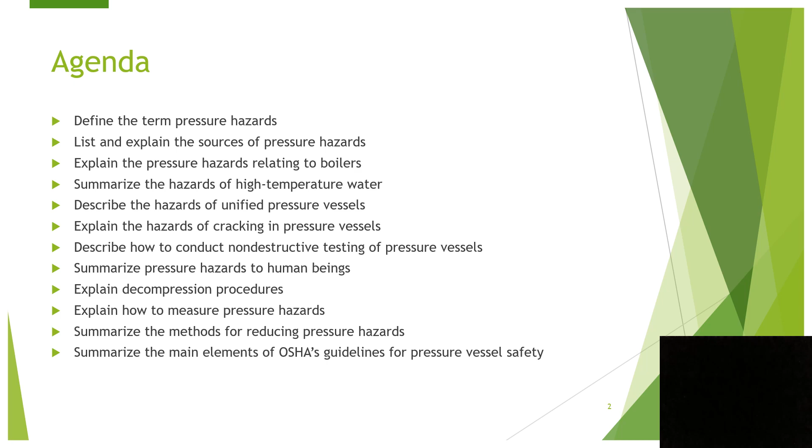What is pressure? Pressure is defined in physics as the force exerted against an opposing fluid or thrust distributed over a surface. This may be expressed in force or weight per unit area.

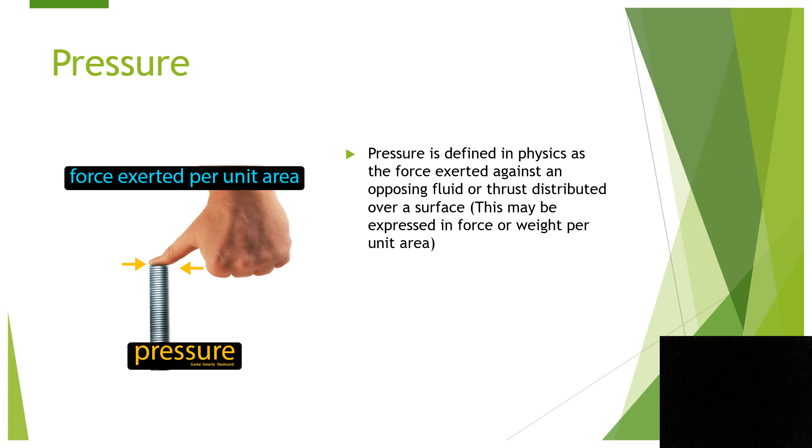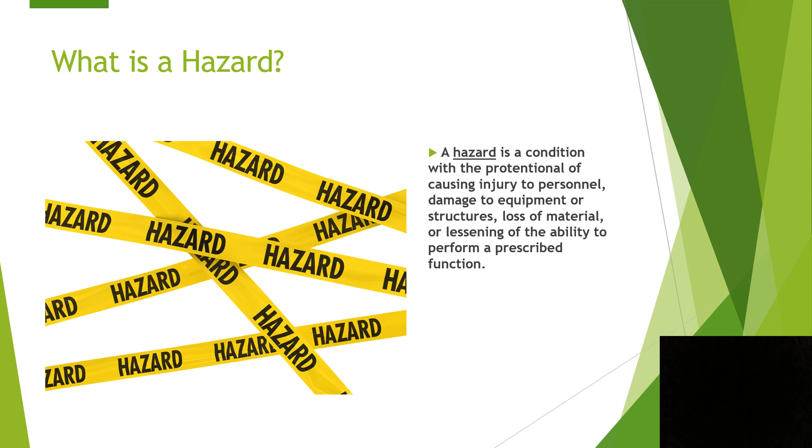What is a hazard? A hazard is a condition with the potential of causing injury to personnel, damage to equipment or structures, loss of material, or lessening of the ability to perform a prescribed function.

So what's a pressure hazard? A pressure hazard is a hazard caused by a dangerous condition involving pressure. Critical injury and damage can occur with relatively little pressure.

The Occupational Safety and Health Administration, or OSHA, defines high pressure cylinders as those designated with a service pressure of 900 psi or greater. I have a quick video that's going to show how pressure vessels can be deadly, and what the effects of a pressure vessel without the proper safeguards can actually do to a facility.

Hello, I'm Chemical Safety Board Chairman John Bresland with a safety message. Pressure vessels are everywhere throughout industry. From major chemical plants to service stations, they are indispensable to modern life. But without appropriate safeguards, pressure vessels can present lethal hazards. These hazards can occur when the vessels are improperly installed, welded, or modified, or when they lack effective pressure release systems. The Chemical Safety Board has investigated a number of serious, even fatal accidents where pressure vessels failed suddenly and without warning, creating deadly projectiles. My safety message is simple: pressure vessels store huge amounts of energy, and you must never become complacent about the risks.

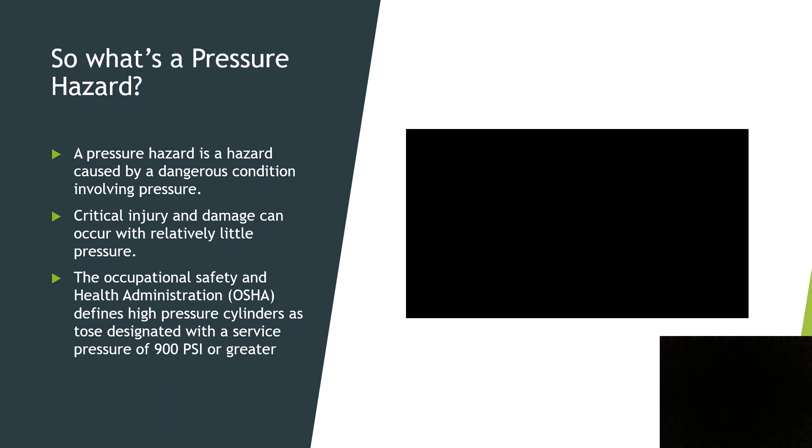So now we're going to go over the sources of pressure hazards: poor or insufficient training of employees, design, construction, or installation errors, improper application of equipment, insufficient or improper inspections, insufficient preventative maintenance, failures or blockage of control or safety devices, and mechanical breakdown or failure, or just human error.

I have a video of an actual explosion of a steam boiler. This gives a good example of the damage that a pressure vessel explosion can have on a facility.

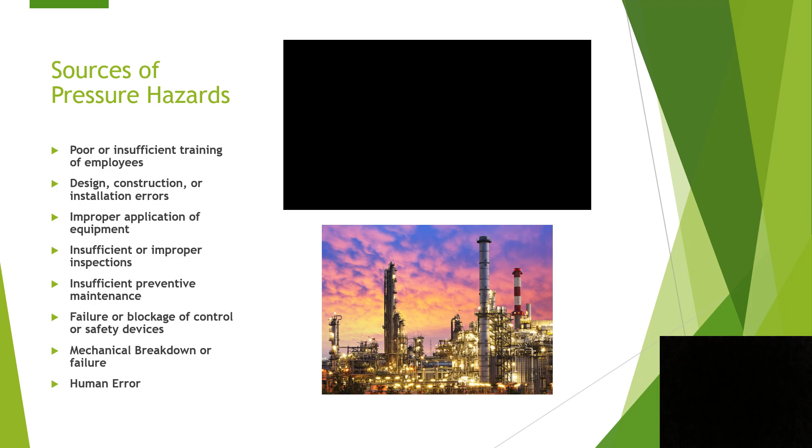So what are some of the pressure hazard prevention measures for boilers? OSHA recommends the following daily, weekly, monthly, and yearly accident prevention measures in 29 CFR 1910 subpart H.

Daily checks consist of checking the water to make sure it is at the proper level, venting the furnace thoroughly before starting the fire, and warming up the boiler using a small fire. When the boiler is operating, check it frequently.

As for your weekly checks, at least once every week, test the low water automatic shutdown control and record the results of the test on a tag that is clearly visible.

For your monthly checks, at least once every month, test the safety valve and record the results of the test on a tag that is clearly visible.

For your yearly checks, the low-level automatic shutdown control mechanism should be either replaced or completely overhauled and rebuilt. Arrange to have the vendor or a third-party expert test all combustion safeguards, including fuel pressure switches, limit switches, motor starter interlocks, and shutoff valves.

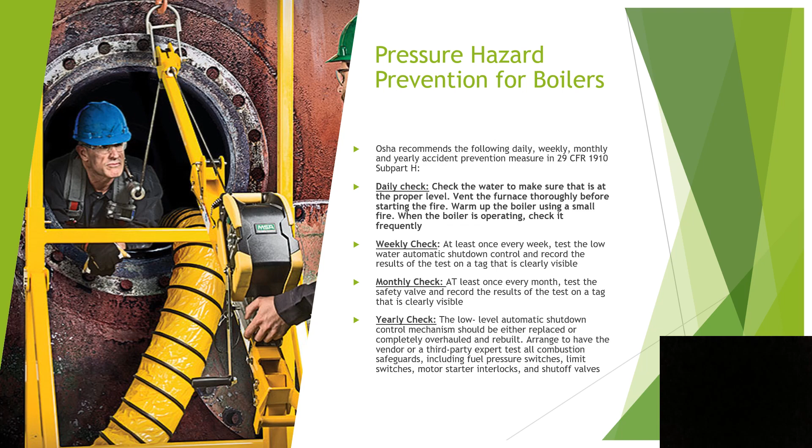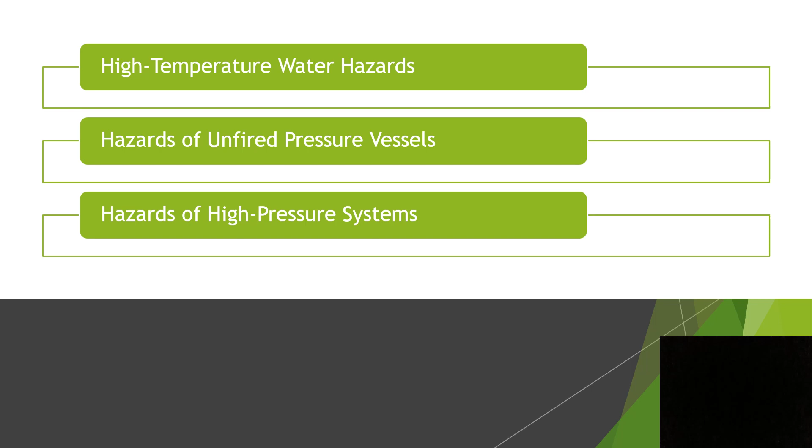Next, we're going to go over the high temperature water hazards, hazards of unfired pressure vessels, and hazards of high pressure systems. This will be covered in the next slides.

High temperature water systems are basically heated to a very high temperature, but not high enough to produce steam.

Some of the hazards with these systems are operator error, and human contact with high temperature water can result in serious burns or even death.

Improper design is another hazard. The best designs are simply operator friendly, so they don't require a lot of follow-on training to be able to operate them. Too many automatic controls can impede proper operator response to emergencies, so if they're too complicated, it can actually hinder the operation of these high temperature water systems.

High temperature water can be used as an economical substitute for steam, for example, in industrial heating systems.

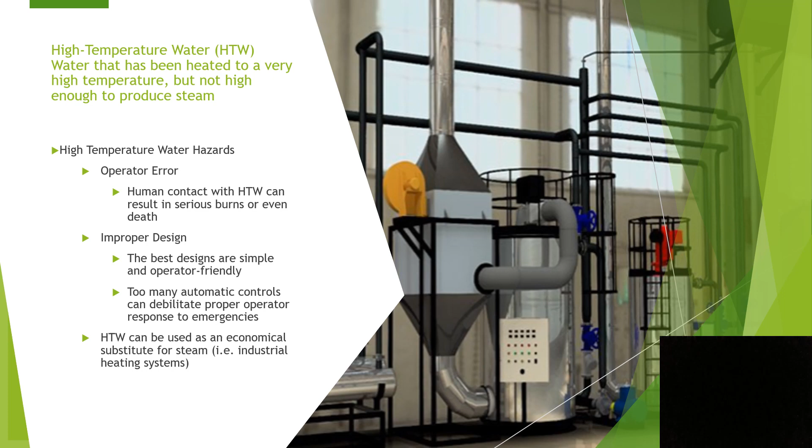Unfired pressure vessels create heat internally by various means rather than by external fire. For example, steam jacketed kettles.

The potential hazards with these are hazardous interaction between the materials of the vessel and the process material, inability to carry the weight and internal pressure of its contents, and inability to withstand pressure caused by chemical reaction during processing.

Basically, when you have a chemical process that creates energy in the form of heat, that heat can create pressure in a vessel. So it's definitely risky when mixing chemicals together with an exothermic reaction.

Also, there's an inability to withstand accidental or intentional vacuum. Some preventative measures you could take are proper design and construction, working pressure and temperature range, stress relief, radiography, and continual inspection and periodic testing.

A lot of the time when a manufacturer decides to purchase a vessel, they have to meet certain codes. They have to be built to a certain standard, such as documentation like MTRs showing what material it's made from, radiography testing, PMI testing, and all your NDE testing.

There are certifications that a lot of the customers who buy these vessels want. That way, if they're put into a situation, they have the documentation to at least prove that they followed this code, or it was built to this standard.

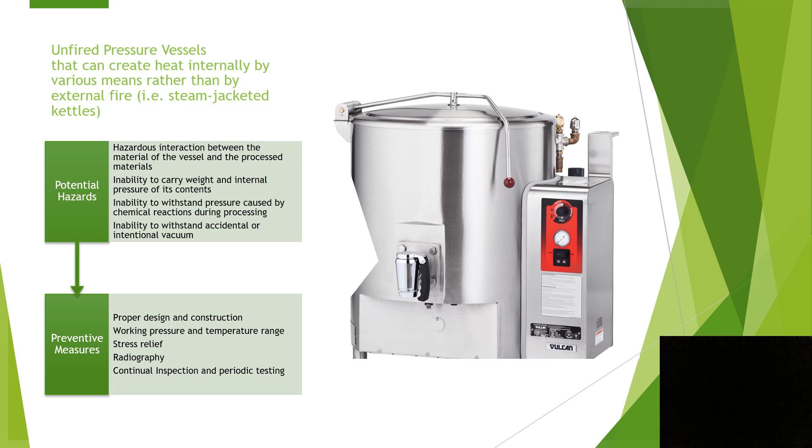And so, if something was to happen, they have that to prove that they checked all their boxes.

Some of the hazards of high pressure systems include leaks, pulsation, vibration, and release of high pressure gases.

Some of the hazard reducing strategies are using anchored pipe supports, limiting the number of joints in the system, and using pressure gauges. A lot of the time you can use a gauge pressure transmitter.

Overall, a lot of the smart pressure transmitters now can send a 4 to 20 milliamp signal back to a DCS or control board for a lot of chemical plants and oil refineries. That basically sends signals so the operator doesn't have to go out there and constantly check the gauge, especially if it's a critical system.

For non-critical applications, they can just use a standard gauge with analog output, where an operator goes out there and sees where the pressure is at. But with these pressure transmitters, you don't need to do that. They can report back the pressure on the system so the operator has it at his control board and doesn't have to leave the control room.

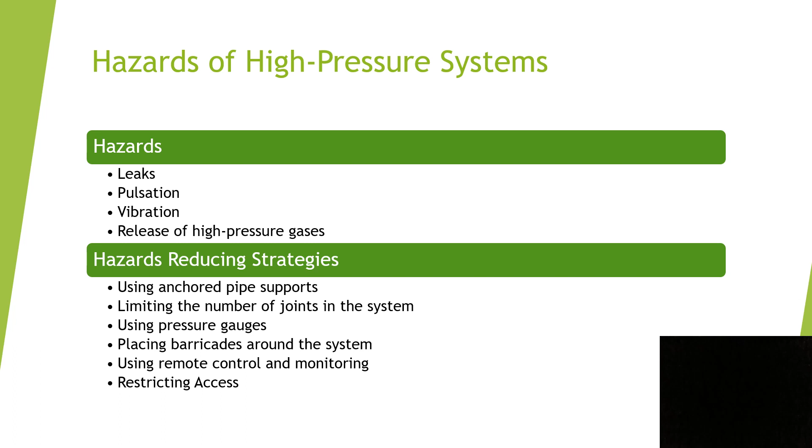You could place barricades around the system. You can also use remote control and monitoring, as I was talking before, and restrict access.

Some of the cracking hazards of pressure vessels: these are considered the most serious hazards in pressure vessels and can lead to complete rupture or leak. Some of the rupturing hazards include blast effects due to sudden expansion of the vessel, possible injury and damage from fragmentation, leak hazards, suffocation or poisoning depending on the contents of the vessel, explosion and fire, and chemical and thermal burns from contact with the contents of the vessel.

If it explodes, the material of the vessel could be displaced pretty far, even out of the confines of the facility. That could be bad because if it lands in a neighborhood or anything like that, an unsuspecting kid or passerby might not know what it is, pick it up, and it could hurt them. They could travel pretty far, especially with an explosion like that.

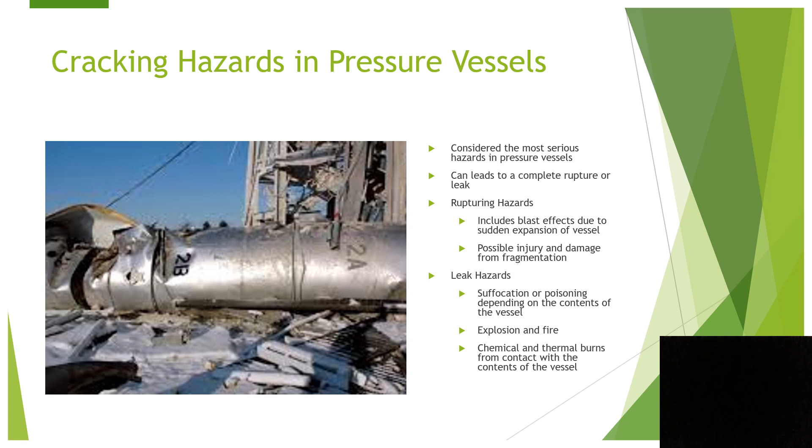Cracking hazards in pressure vessels: these pressure vessels are used in many different applications and contain many different types of substances, ranging from water to extremely toxic chemicals. Leakage or ruptures occur along the welded seams, the bolted joints, and the nozzles, as you can see in the picture.

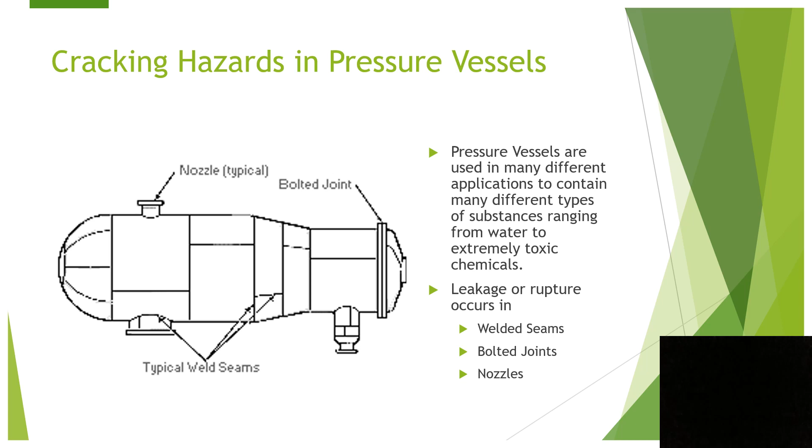Some of the most susceptible pressure vessels to ruptures and leaks are the deaerator vessels. They basically remove non-condensable gases, primarily oxygen, from water used in steam generation. They're used in applications such as power generation, pulp and paper processing, chemical processing, and petroleum refining. The failures include cracks caused by water hammer at welded joints that were not post-weld heat treated, and cracks caused by corrosion fatigue.

Then you have amine vessels, which remove hydrogen sulfide from petroleum gases such as propane and butane. They're also used for removing carbon dioxide, and are used in petroleum refineries, gas treatment facilities, and chemical plants. The failures include cracks in stressed or unrelieved welds.

Then you have wet hydrogen sulfide vessels. Basically, any fluid that contains water and hydrogen sulfide is considered wet hydrogen sulfide. Many of the vessels that contain wet hydrogen sulfide are made of steel. Hydrogen is generated when steel is exposed to such a mixture. Failures include cracking, blistering, and embrittlement, particularly in high-strength steels.

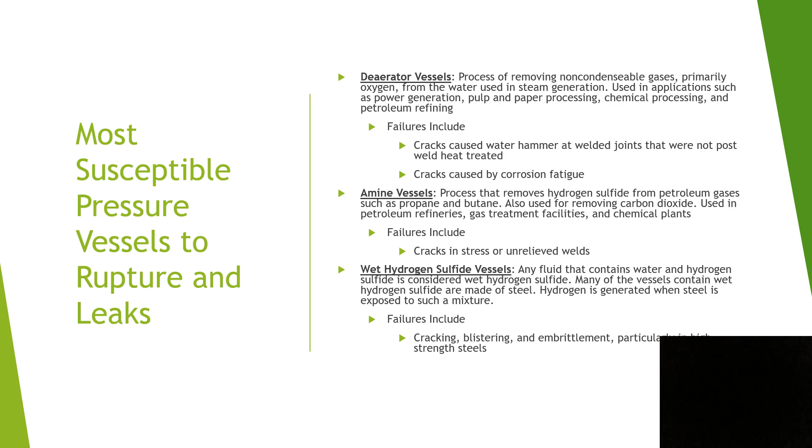The most susceptible pressure vessels to rupture and leak, continued: ammonia vessels are another one, typically constructed as spheres of carbon steel. These vessels are used for the containment of ammonia in commercial refrigeration systems and chemical processes. Failures include water and oxygen content in ammonia causing carbon steel to crack, particularly near welds.

Then you have pulp digester vessels. The process used to digest pulp in the manufacture of paper involves the use of a weak solution of sodium hydroxide and sodium sulfide in a temperature range of 110 degrees Celsius to 140 degrees Celsius, which is 230 degrees Fahrenheit to 284 degrees Fahrenheit. Some of the failures include cracking along welded seams, primarily due to caustic stress corrosion.

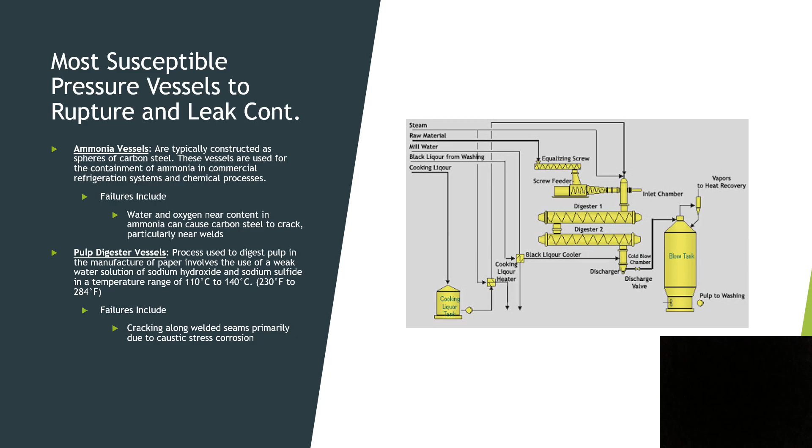To prevent these ruptures or leaks, it is necessary to examine the pressure vessels periodically.

There are 5 widely used non-destructive methods for testing: visual examination, liquid penetrant test, magnetic particle test, X-ray radiography, and ultrasonic test.

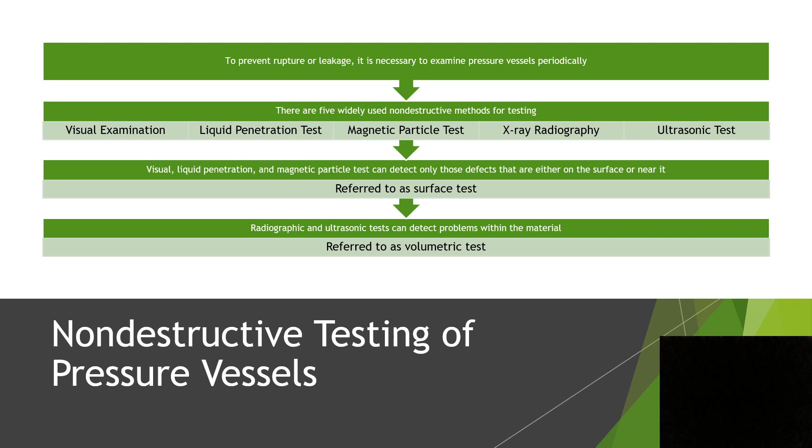Visual, liquid penetration, and magnetic particle tests can detect only those defects that are either on the surface or near it. These are referred to as surface tests. For radiographic and ultrasonic tests, they can detect problems deep within the material, so these are referred to as volumetric tests. All these tests are referred to as non-destructive testing.

Some of the types of non-destructive testing we went over before: the visual examination, which consists of taking a thorough look at the vessel to detect signs of corrosion, erosion, or hydrogen blistering. Then you have the liquid penetration test, which involves placing a specially formulated liquid penetrant over an area and letting it seep in. A developing agent is then applied, which draws out the entrapped penetrant and magnifies the discontinuity.

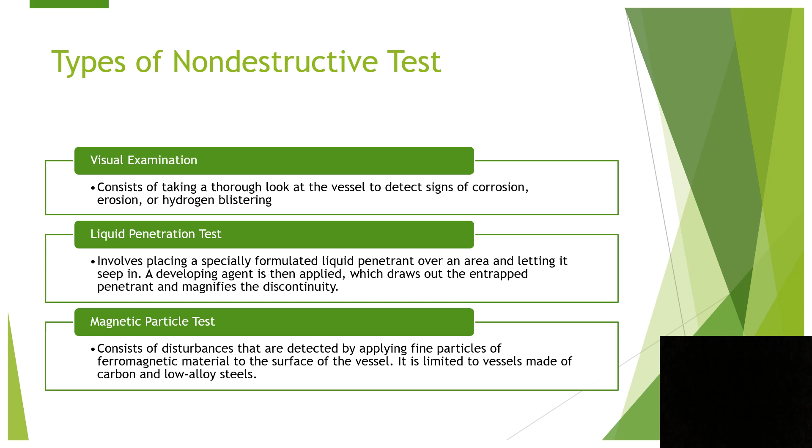Then you have the magnetic particle test, which consists of disturbances that are detected by applying fine particles of ferromagnetic material to the surface of the vessel. It is limited to vessels made of carbon and low alloy steels.

Then you have X-ray radiography. This test amounts to making an X-ray negative of a given portion of the vessel. The process works the same way as those used by a physician or dentist. So if you go to the doctor and they need to take an X-ray, same kind of concept - it sends X-ray particles and brings back an image.

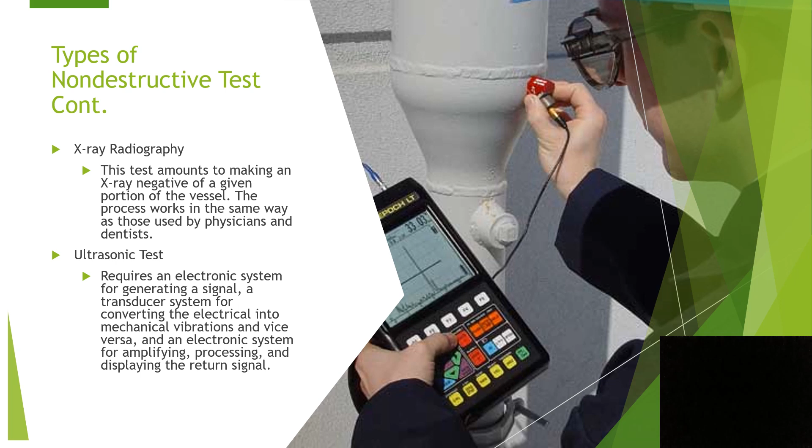Then you have an ultrasonic test. It requires an electronic system for generating a signal, a transducer system for converting electrical into mechanical vibrations and vice versa, and an electronic system for amplifying, processing, and displaying the return signal.

Some of the pressure dangers to humans: one, you have anoxia, which refers to the rare case of total lack of oxygen. Then you have hypoxia, which is a condition that occurs when the available oxygen is reduced. It can occur while ascending to a high altitude or when oxygen in air has been replaced with another gas, which may happen in some industrial situations.

When you think of hypoxia, I think of deep sea divers going to deep depths and having to come up to the surface. A lot of times they have to go into a decompression chamber so that the pressure in their body can come back down to atmospheric. That way, if they don't, bubbles can form in their blood, and that causes problems.

Most likely death. Then you have altitude sickness, a form of hypoxia associated with high altitudes. It can cause malaise, shortness of breath, fatigue, euphoria, along with the reduction of powers of reason, judgment, and memory. Worst of all, you could lose consciousness. And if you lose consciousness, like on top of a mountain in the middle of nowhere, you could possibly die if no one finds you.

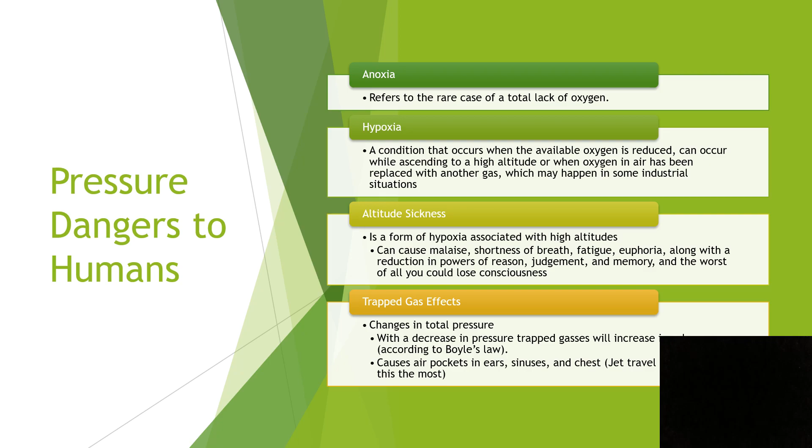Some of the pressure dangers to humans: you have evolved gas effects. It's associated with the absorption of nitrogen in body tissue. When breathed, nitrogen can be absorbed into all body tissues in concentrations proportional to the partial pressure of nitrogen in the air. If the nitrogen in body tissue, such as blood, is being absorbed faster than it is being exhaled, bubbles of gas may form in the blood and other tissues. This may cause decompression sickness, which can be painful and occasionally fatal.

And you have dysbarism. When the formation of gas bubbles is due to rapid ambient pressure reduction, major causes include releasing of gases from the blood and the attempted expansion of trapped gas in body tissue. This usually occurs when working under sea level or in pressurized containers.

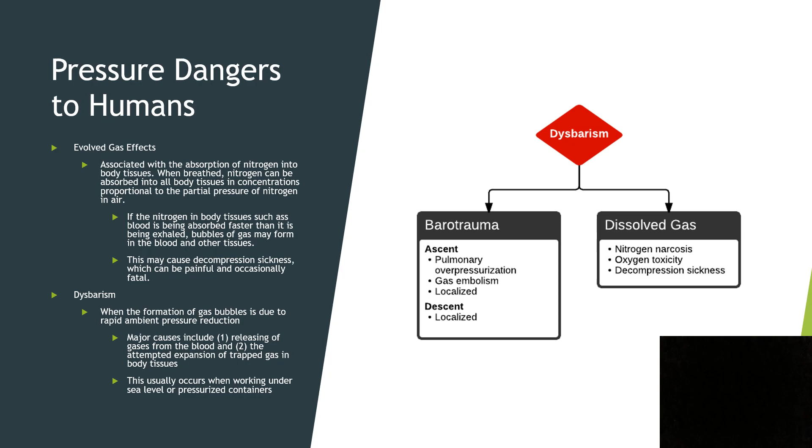Some of the pressure dangers to humans are what they call the creeps. It's caused by bubble formation in the skin, which causes an itchy, crawling, rashy feeling. Bubbles occurring in the brain, although rare, may cause tingling and numbing, severe headaches, spasticity of muscles, and in some cases blindness and paralysis.

Chokes are coughing and choking resulting from bubbles in the respiratory system. This often happens, and severity depends on duration of time untreated.

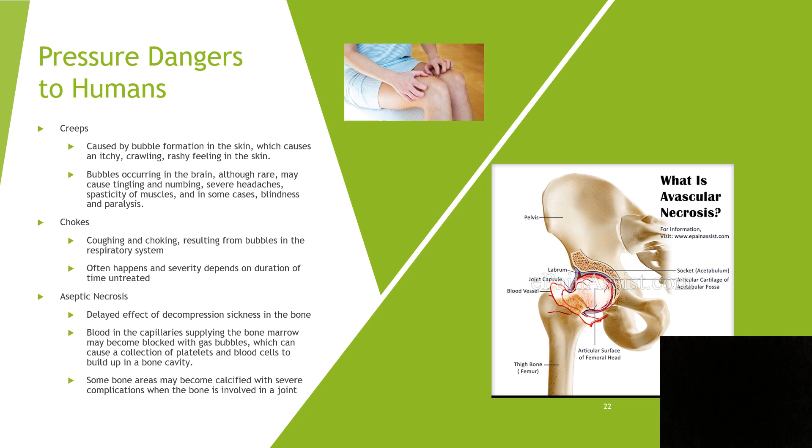Then you have aseptic necrosis, a delayed effect of decompression sickness in the bone. Blood in the capillaries supplying the bone marrow may become blocked with gas bubbles, causing a collection of platelets and blood cells to build up in a bone cavity. Some bones may become calcified, with severe complications when the bone is involved in a joint.

The majority of decompression scenarios will need to occur in two stages. Above is a table that briefly demonstrates how to use a two-stage decompression table. An employee will be working for 4 hours in an environment with a working chamber pressure of 20 pounds per square inch gauge pressure, PSIG.

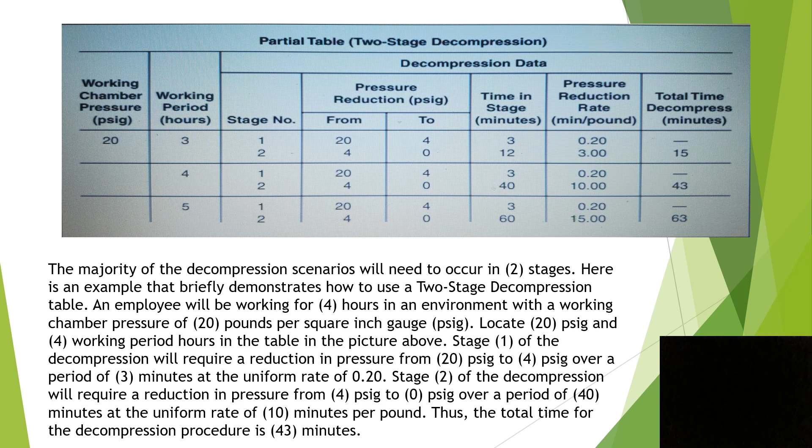Locate 20 PSIG and 4 working period hours in the table above. Stage 1 of the decompression will require a reduction in pressure from 20 PSIG to 4 PSIG over a period of 3 minutes, at a uniform rate of 0.20 minutes per pound. Stage 2 will require a reduction in pressure from 4 PSIG to 0 PSIG over a period of 40 minutes, at a uniform rate of 10 minutes per pound. Thus, the total time for the decompression procedure is 43 minutes.

Measurement of pressure hazards: confirming the point of pressurized gas leakage can be an arduous task. Typically, after a gas has leaked out into the atmosphere to a level of equilibrium with its surrounding area, the symptoms of the leak could disappear. There are several methods that allow employees to detect pressure hazards, which will be listed on the next slide.

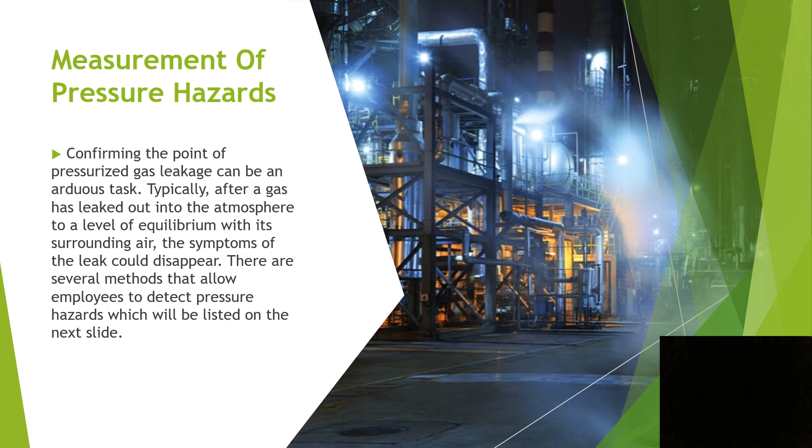Ways to detect pressure hazards: by sounds, gas discharge may be indicated by a whistling noise, particularly with highly pressurized gases escaping through small openings. Cloth streamers, or a soap solution smeared over the vessel surface, so that bubbles form when gas escapes. Scent may be added to gases that do not actually have an odor - the smell sometimes noticed in homes that cook or heat with natural gas is not the gas itself, but a scent added to it. Leak detectors that measure pressure, current flow, or radioactivity may also work for some types of gases.

Corrosion may be the long-term effect of escaping gases. Metal cracking, surface roughening, and general weakening of materials may result from the corrosion.

Some of the potential causes of leaks: contamination by dirt can prevent the proper closing of gas valves, threads, gaskets, and other closures used to control gas flow. Overpressurization can overstress the gas vessel, permitting gas release. Excessive temperature applied to dissimilar metals that are joined may cause unequal thermal expansion, loosening the metal-to-metal joint and allowing gas to escape. Operator errors may also lead to a hazardous gas release from improper closure of valves, inappropriate opening of valves, or overfilling of the vessel.

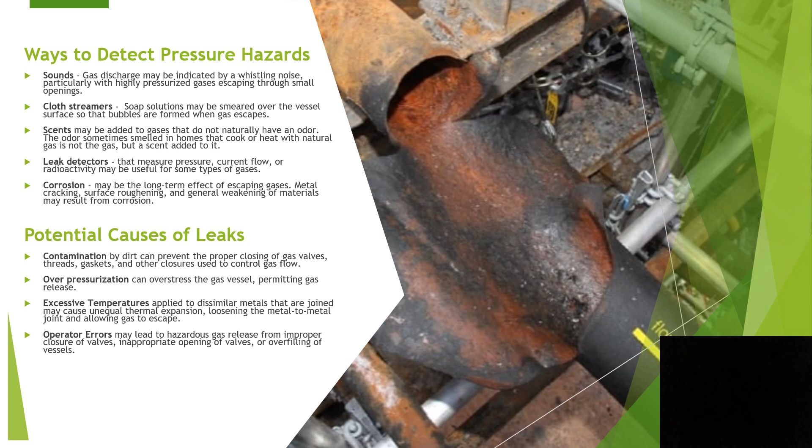The destructive, non-destructive, and proof pressure leak tests: the destructive method of testing destroys the material being checked. Proof pressure generates stresses to gas containers, typically 1.5 to 1.667 times the maximum expected operating pressure for that container. Strain measurements may also be collected to indicate permanent weakening changes to the container material that remain after pressure is released.

Non-destructive testing methods do not harm the material being tested. These may include mixing dye penetrants and magnetic or radioactive particles with the gas and then measuring the flow of the gas. Ultrasonic and X-ray waves are another form of non-destructive testing and are often used to characterize materials and detect cracks or other leakage points.

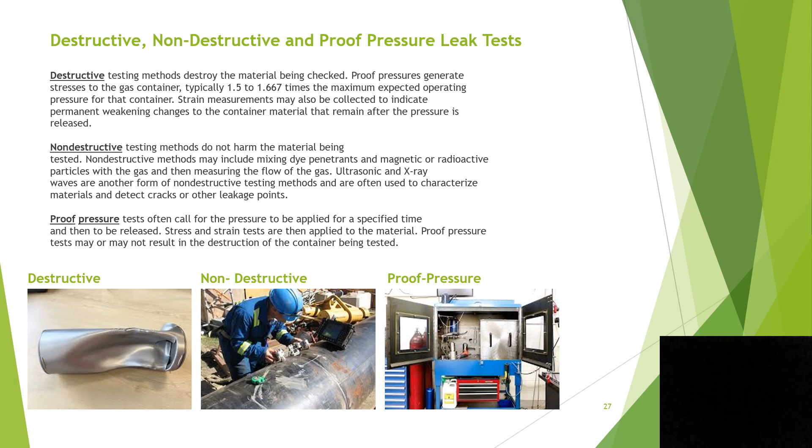And then you have the proof pressure test. Tests often call for the pressure to be applied for a specified time and then released. Stress and strain tests are then applied to the material. Proof pressure tests may or may not result in the destruction of the container being tested. Examples of destructive, non-destructive, and proof pressure tests are shown below.

Reduction of pressure hazards often requires better maintenance and inspection of equipment that measures or uses high pressure gases. Proper storage of pressurized containers reduces many pressure hazards.

Pressurized vessels should be stored in locations away from cold or heat sources, including the sun. Cryogenic compounds, those that have been cooled to unusually low temperatures, may boil and burst the container when not kept at the proper temperature. The whipping action of pressurized flexible hoses can also be hazardous. Hoses should always be firmly clamped at the ends when pressurized.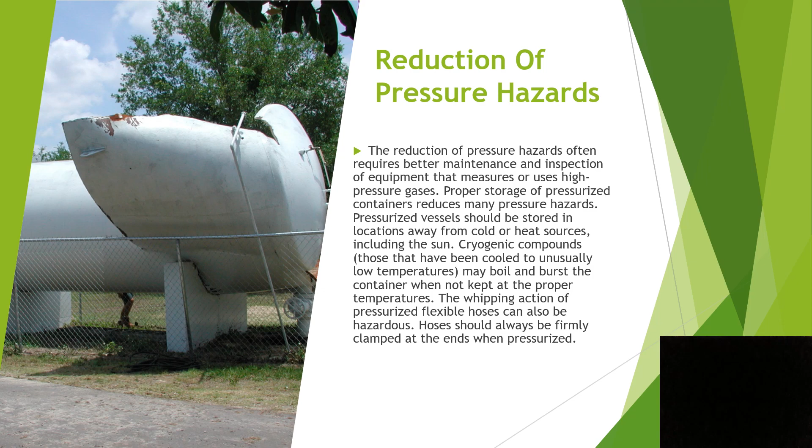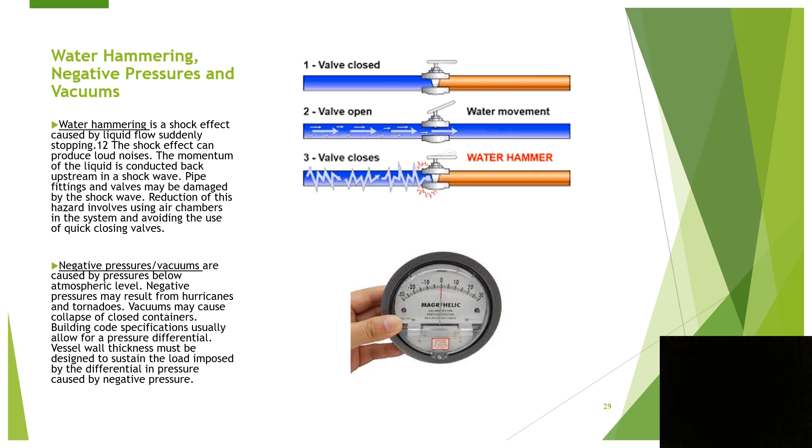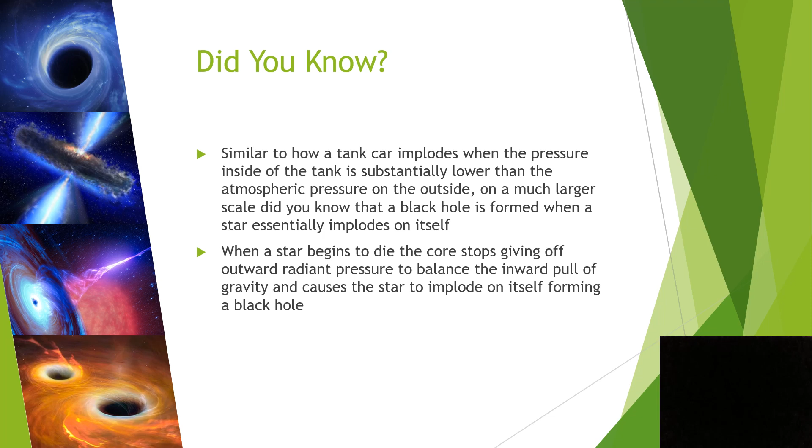And just a quick did you know fact: similar to how a tank car implodes when the pressure inside the tank is substantially lower than the atmospheric pressure on the outside, on a much larger scale, did you know that a black hole is formed when a star essentially implodes on itself? When a star begins to die, the core stops giving off outward radiant pressure to balance the inward pull of gravity and causes the star to implode on itself, forming a black hole.

These are some of the OSHA standards and guidelines for pressure hazards. There's no OSHA standard specifically for pressure hazards. They're somewhat covered in 29 CFR 1910 subpart H, hazardous materials, specifically 1910.101 through 1910.105, 1910.110, and 1910.111. Subsections 101 through 105 talk about compressed gases in general, specifically acetylene, oxygen, hydrogen, and nitrous oxide. The link below at law.cornell.edu will take you to those subparts.

Publication 8-1.5, Guidelines for Pressure Vessel Safety. These provide guidelines for safety and health professionals in reference to pressure vessel design, inspection methods, cracking in pressure vessels, conducting safety assessments, etc. You have the link to the OSHA.gov website, which talks about these guidelines.

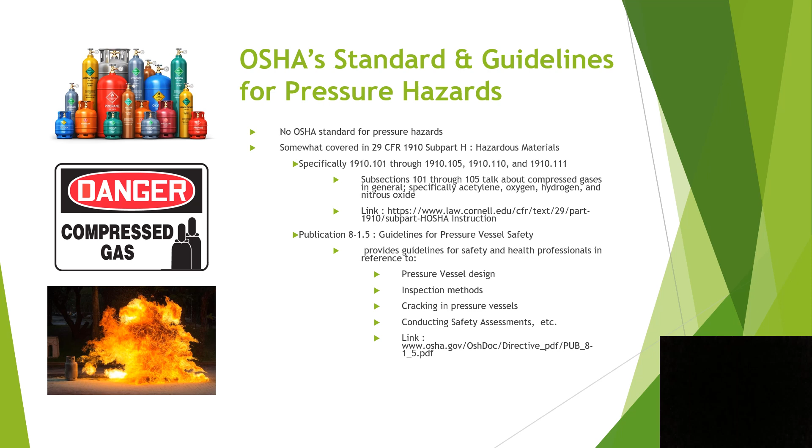Then you have confined spaces in pressure vessels. What is a confined space? A confined space is any workplace that has limited means of entry and exit, and it's large enough for a person to fit in, although it's not designed to be occupied by humans.

Installation and maintenance of pressure vessels often involves working in confined spaces. So to do the proper maintenance of these pressure vessels, you have to send someone into a confined space to do the inspection, clean out the vessel, or whatever needs to be done. That's kind of just a normal thing in a chemical plant or oil refinery.

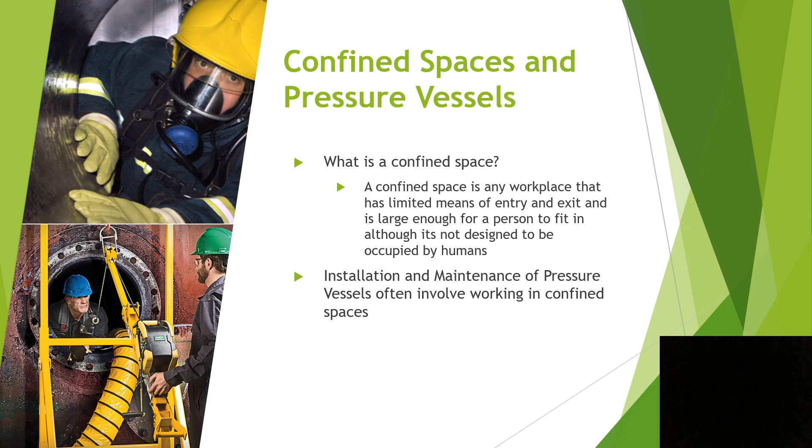In summary, pressure, just to go over it again, is defined in physics as a force exerted against an opposing fluid or solid. Pressure is perceived in relation to the Earth's atmosphere. Barometers are used to measure atmospheric pressure. Boyle's law states that the product of a given pressure and volume is constant with constant temperature: P1 V1 equals P2 V2 when T is constant.

Several methods are used to detect pressure hazards: sounds, cloth streamers, soap solutions, scents, leak detectors, and visual checks for corrosion or contamination. Detection of pressure hazards includes destructive and non-destructive testing. Pressurized cylinders and other vessels should be stored away from cold or heat sources, including the sun. Negative pressures or vacuums are caused by pressures below atmospheric level.